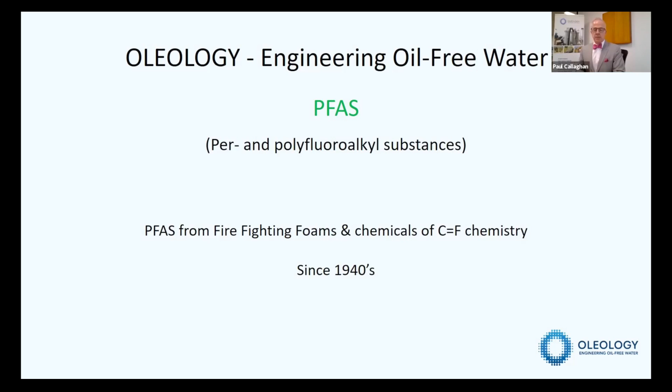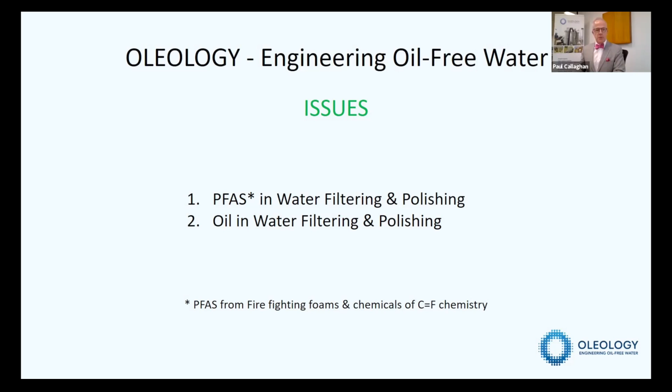It's made its way into water, and we need to talk about the impacts on human life and the environment, but also then how we overcome it. And while we're talking about PFAS, it's not possible to consider how to treat PFAS if you don't also consider the oil in water and the ability to remove the oil in the water, the organics that are often associated with PFAS.

It's not found in nature, it's purely man-made. It has serious health implications. It's linked to several cancers. Very disturbingly, it's an endocrine disruptor. So that has an impact on humankind, but it also has a big impact on fish spawning and the fingerlings, basically the reproductive system, both in humans and in animals in nature.

It's absorbed by ingestion, and the impact of the forever chemical, as it's termed, for PFAS is in the order of 40 to 90 years. So roughly 2 to 4 generations before its half-life has been reached.

They do break down and oxidize very quickly by comparison. Not only does it have a very long half-life in nature, in the environment, and in our bodies, but there's no medical intervention able to remove PFAS from our bodies once it's been absorbed. The best and only intervention is to stop the exposure. And that's what we're here to talk about today.

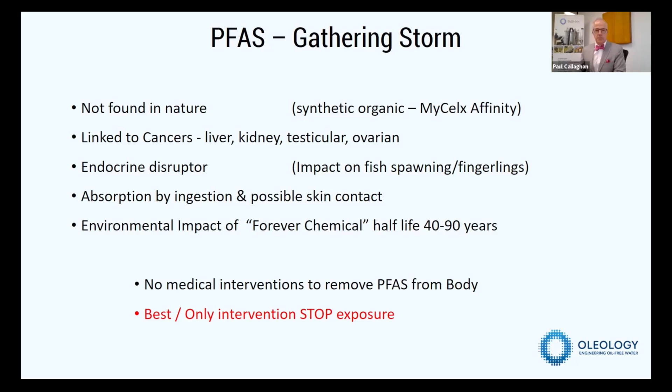In the oil and gas industry and mining, in waste, rubbish, landfills, it's listed on the Stockholm Convention. Many of the countries from which you would be listening to this presentation today will be a party to the Stockholm Convention, aimed at reducing environmental disruption as a result of contaminants. In Australia, it's part of the National Environmental Management Plan 2, and in the US, legislation in 6 states, that will be enacted in the middle of this year coming, that's 2021.

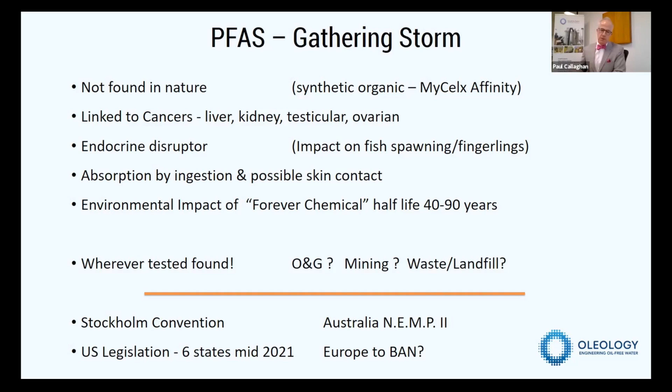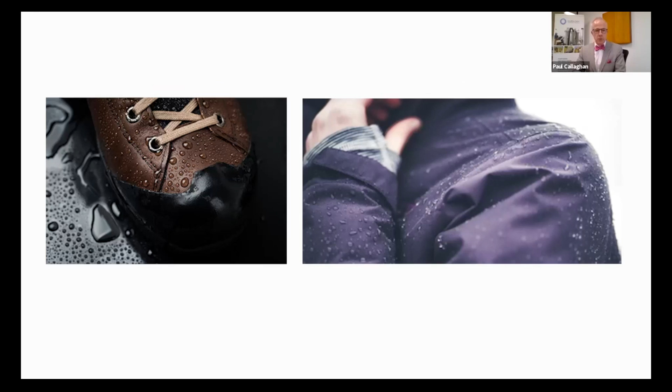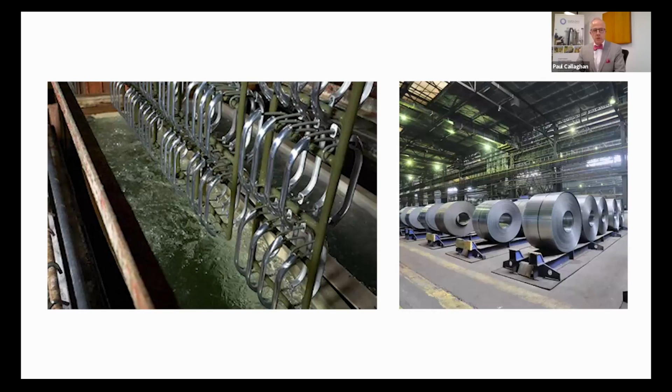And in European areas, they're looking to enact a complete ban on PFAS products, which is quite difficult because PFAS is found throughout a range of industrial applications and also very simple use, such as cardboard linings, paper bags. It's used in waterproofing and stain guard protection. It's an active ingredient in pesticides. Part of the process for the manufacturing of printed circuit boards, metal plating industries, firefighting foams is prevalent and still in use around the world in many locations.

All of that finds its way down into the wastewater treatment plants, in industry, through the sewer system, into the wastewater treatment plants, which ultimately discharge into the river and to the ocean, finding their way into fish stocks, ultimately for ingestion by ourselves. Similarly, for waste, it leaches out the PFAS.

PFAS is highly soluble and it continues to leach into water for a long period of time. That may find its way into the soil. The groundwater then continues its progression towards the river and ocean, and again ends up in fish stocks. The other issue, and I mentioned soil, is it finds its way into the soil.

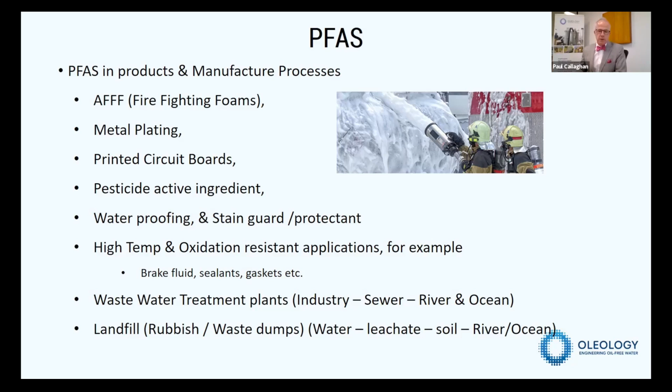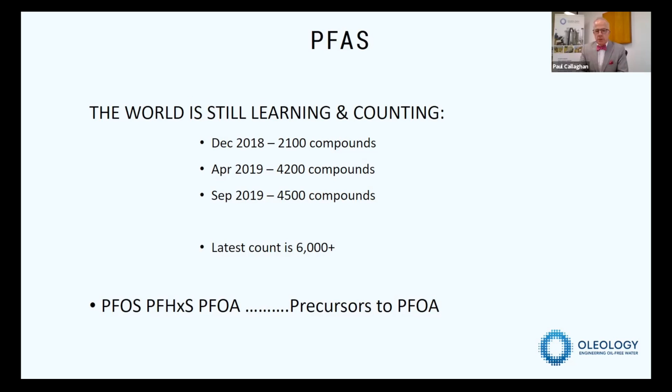PFAS is found with hydrocarbons. If we look at the brief history of our development, and where we started about 16 years ago, working with air services in their fire training grounds, the PFAS that we were really seeking to remove was as a result of the AFFF firefighting foam, AFFF being aqueous film forming foams. In that particular instance, the aqueous film forming foam was used in conjunction with jet fuel to form the basis of the fire.

Fire trainers, the firefighters, then as part of their training, quelled those fires with aqueous film forming foam. All of that water, unburnt jet fuel, partially burnt jet fuel, and the AFFF foam made a highly emulsified mix of oily water that was chemically stable.

So in order to treat that and make it safe for discharge to the environment, we had to achieve a discharge of oil in the water of less than 0.6 parts per million, or 600 parts per billion. That was the requirement back in 2004, for the PFAS from the water.

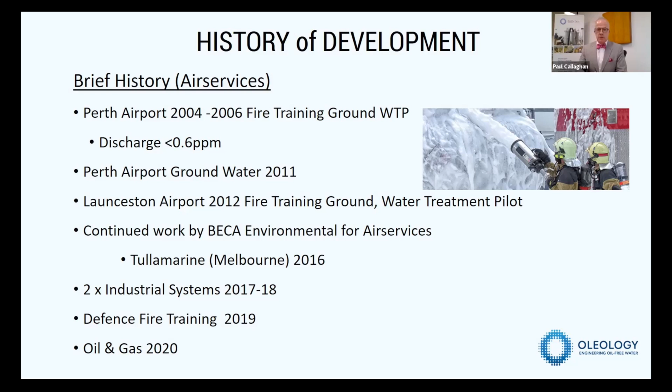That was proved in discussions in Australian Parliament as part of the Senate's Estimates Committee hearing into methods. To have a robust system, you need to be able to treat hydrocarbons, both in their free, dispersed and emulsified form.

And we do that with MyCelx. We're able to do it because MyCelx has got the smallest footprint, very small cost of operation. Importantly, with treating both hydrocarbons and PFAS in association with those hydrocarbons, we end up with a minimal volume of dry waste. The waste needs to be considered in any form of treatment for PFAS.

Sludges are expensive to treat, difficult to move, and ultimately very costly. Backwashing of systems also produces further concentrated waste, which also requires costly treatment. The best and safest manner is a dry waste with the PFAS contained within it, which makes it environmentally safe.

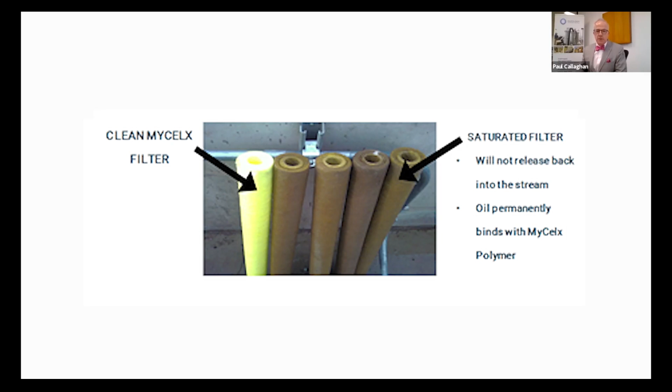There's also, in our processes of treatment, no residual chemical, nor chemical dosing required. We have a fixed chemistry within our systems.

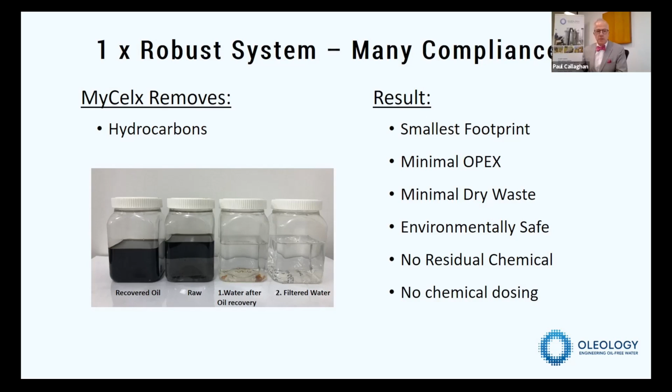All emulsions via cartridge filtering, which you can see in the second picture, and the cartridge is portrayed in the middle of that oily water mixture, and on the right hand side in each of those pictures shows the water after discharge, having been treated by the oleology with the MyCelx treatment process.

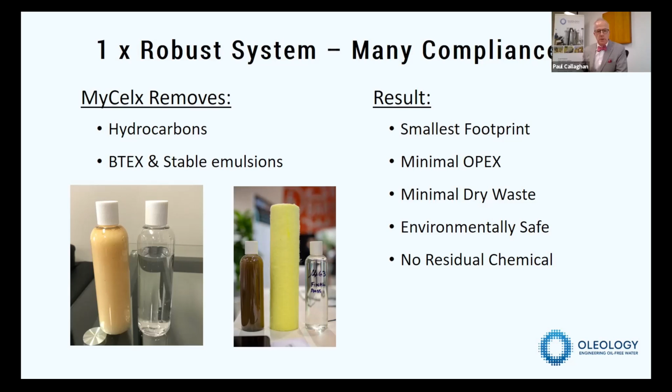We're able to, from left to right, see decreasing size of oil droplet. Oil droplets of a 50 micron size are easy to separate out. As the oil droplet size decreases, it becomes increasingly more difficult for conventional equipment to remove that oil droplet. MyCelx expands the entire range.

We remove and recover oil in its larger forms down to about 5 micron droplet size, and that's in the primary stage, the first of the red arrows. The second stage is able to remove oil and oily emulsions at a very smaller droplet size, down to about 4 microns in size, depending upon its state.

And the final stage is the filtering stage, which is able to remove oil droplets down to 0.09 droplet size. We're getting into the heavily emulsified, oil-soluble components, and it's in this stage and just beyond there that we begin the removal of the PFAS.

It's important to understand that PFAS is at the highly soluble end, and unless you remove the other contaminants before it, your PFAS polishing stage suffers. There are a few conventional types of PFAS removal, such as granular activated carbon and ion exchange.

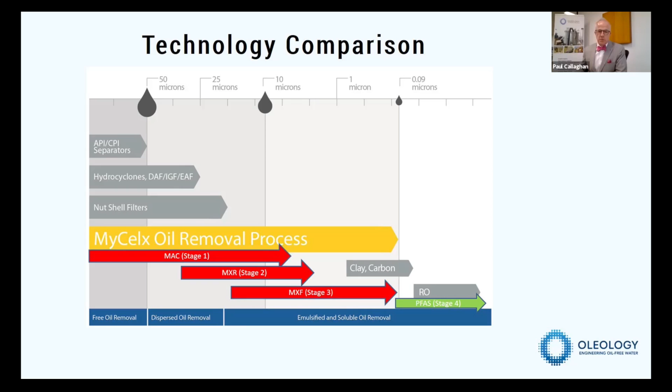So the pre-filtering process removes and discharges PFAS treated water down to the levels of parts per trillion. If you don't do the primary separation correctly, you will not successfully and commercially viably achieve the treatment for the PFAS.

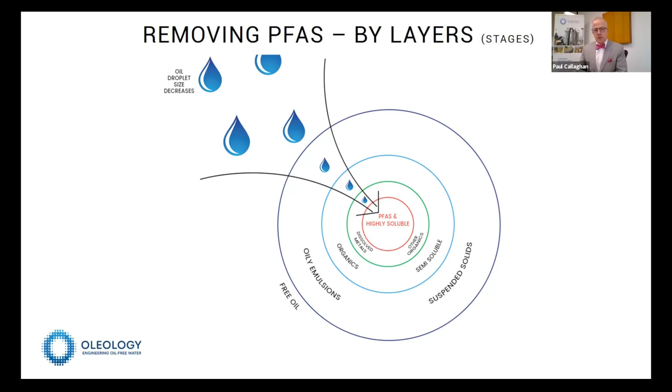We consider that as an onion, progressively starting at the outer layers and removing the greater mass of oily waste or organics, progressively shrinking down the mass of contaminant until you get to the core of the onion, the very small part. That small part is where we are targeting the PFAS reduction. So remove the outer layers, it's much easier to get to the inner targeted layer.

In equipment on the ground, we put that into two 20-foot containers sitting side by side, a footprint of approximately 6 metres long by 2.5 metres wide, so approximately 30 square metres. Fairly small footprint for something that can treat 8 litres per second, about 800,000 litres per day, and achieve a discharge that's below detectable levels when measured in parts per trillion.

We have one pump, so it's very low energy. The systems are automated and have remote monitoring to infer the performance of the equipment. The small footprint I've already outlined.

There's minimal service associated with it. There's no chemistry, no chemicals added to the process, and no chemistry that remains in the water from the process. So again, we reduce the risk of future liability as we do not add any chemical to the water. Our chemistry is fixed, it's non-leaching and non-toxic. MyCelx is hydrophobic, that is, it repels water. So when we remove the cartridges or the filtering media, it's dry. We're able to store those in small containers that are sealed and then sent for thermal oxidation.

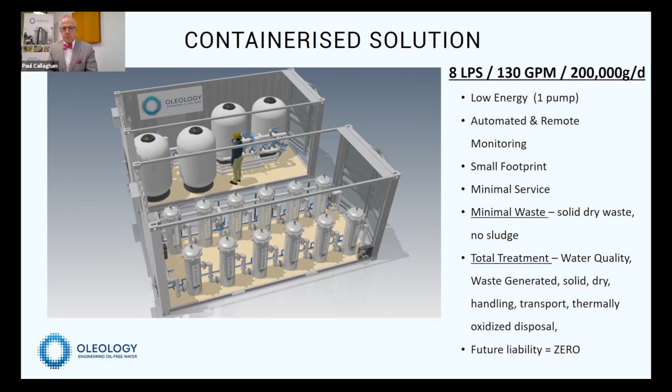So we have a total treatment. We achieve a high standard in terms of footprint. The oleology with the MyCelx technology wins hands down on that - far smaller than granular activated carbon and far smaller than ion exchange systems. The volume of flow relative to the size, MyCelx is about a 20th of the volume of media that's required to achieve the flow rate.

MyCelx again is extremely good. There's limitations in GAC in achieving the short chain reductions of PFAS. Ion exchange, if selectively and correctly selected with enough contact time, can achieve those levels. It's short and long chain hydrocarbons as well as short and long chain PFAS.

So across the board and across all PFAS contaminants - and that's something we really haven't spoken about - of the 6,600 known PFAS contaminants, a number that's probably grown by now, we use TOPA testing, that's total oxidizable precursors assays, to ensure that the total of those known and unknown analytes that can't necessarily be assessed by commercial laboratories at this point in time are covered. We do those TOPA tests to ensure that the total range of carbon fluorine products are removed by the MyCelx process.

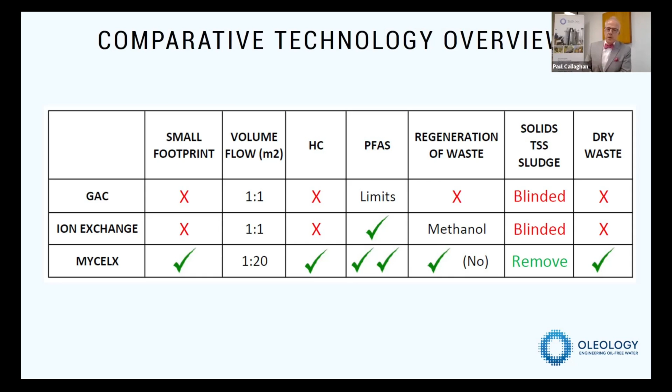And that's removing the hydrocarbons, the emulsions that are created as a result of surfactants formed from the AFFF firefighting foam, removing the PFAS from that water to be treated, and doing that to non-detectable levels here in Australia at 700 metres cubed per day. It's a much smaller system, lower cost.

Of setup, lower cost of operation, lower cost of waste. It makes it affordable for industry to enact, which is to make profit for the shareholder, and the requirements of environmental protection agencies which want to protect the environment. It's bridging the gap between the two. The technology is here and available now.

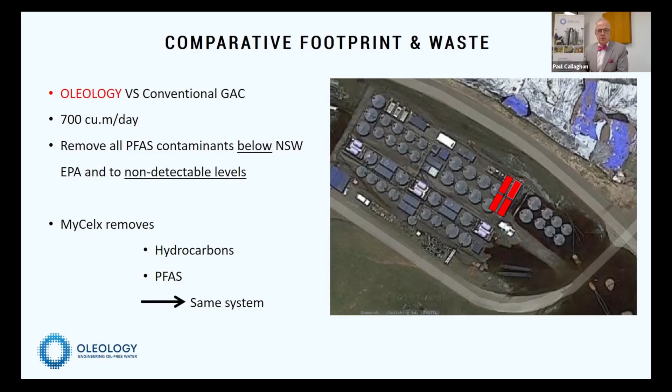That's the basis of the system of removal. It comes in a stage sequence as shown via this graphic. It's applicable to the oil and gas industry, to general industry, to fire training, to mining, to groundwater. It has application for just about any operation.

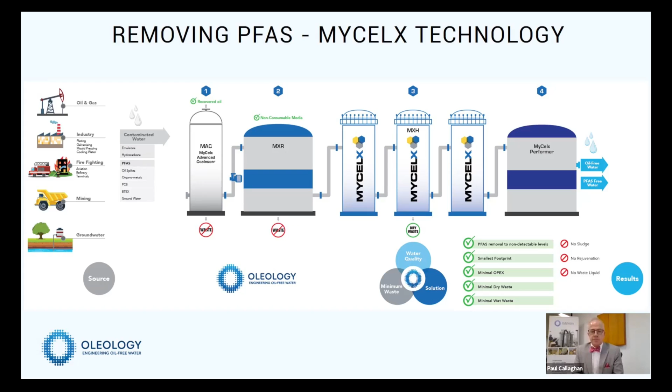Through the first stages, we have no waste generation. They are the polishing stages, the third stage and the fourth stage generate a dry waste. Again, safe and low cost of operation. Thank you for listening.